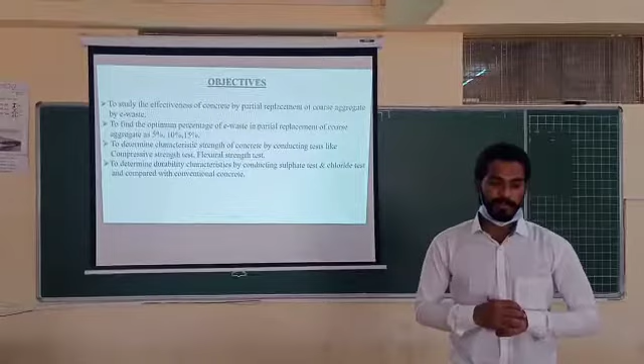Objectives. The main objective is to study the effectiveness of concrete by partial replacement of coarse aggregate by e-waste. To find the optimum percentage of e-waste in partial replacement of coarse aggregate at 5%, 10% and 15%. To determine the characteristic strength of concrete by conducting compressive strength and flexural strength tests. To determine the durability characteristics by conducting sulfate and chloride tests and compare them with conventional concrete.

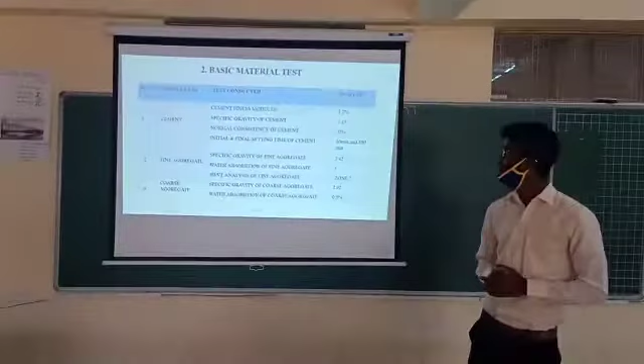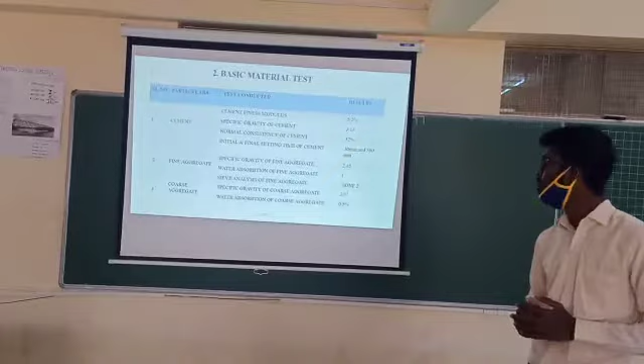We will continue with basic material tests. For cement, the fineness is 5.2%. The specific gravity of cement is 3.15. Normal consistency of cement is 32%. Initial and final setting time of cement is 30 minutes and 580 minutes. For fine aggregate, specific gravity is 2.42, water absorption is 1, and sieve analysis is 2. For coarse aggregate, specific gravity is 2.92 and water absorption is 0.5.

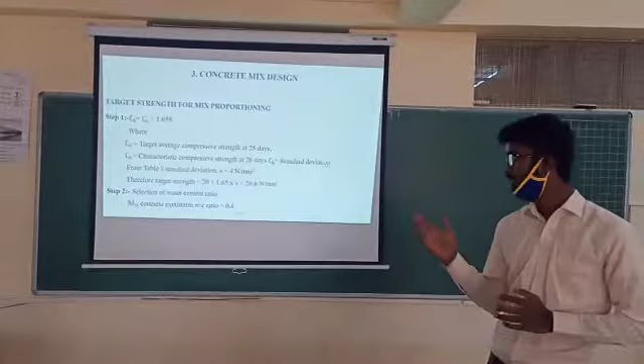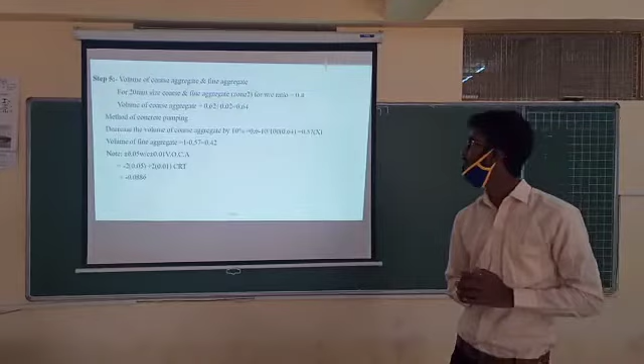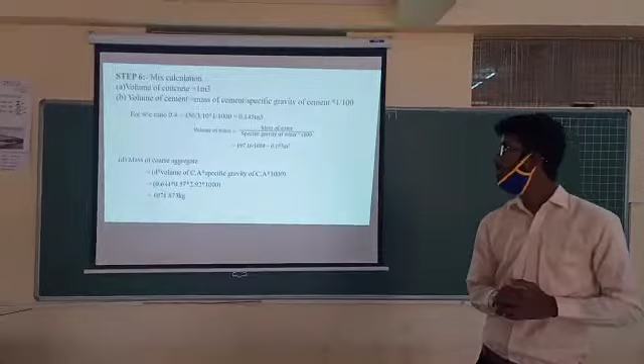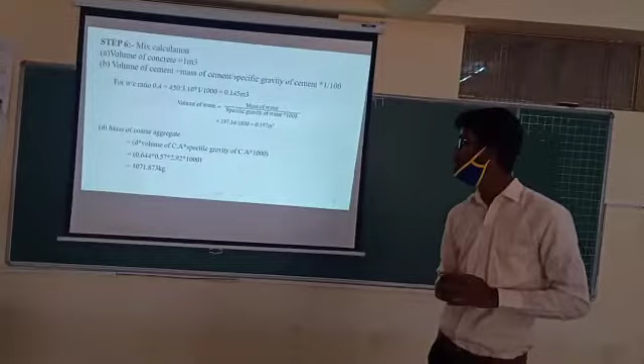From IS 10262, we got the target strength for mix proportion. Our target strength is 26.6 Newton per mm square. We use 0.4 water cement ratio and maximum cement content of 450 kg per meter cube. The volume of coarse aggregate is 0.64 and volume of fine aggregate is 0.4. For 1 meter cube of concrete, volume of cement is 0.145 meter cube and volume of water is 0.197 meter cube. Mass of coarse aggregate is 1071.873 kg and mass of fine aggregate is 670.146 kg.

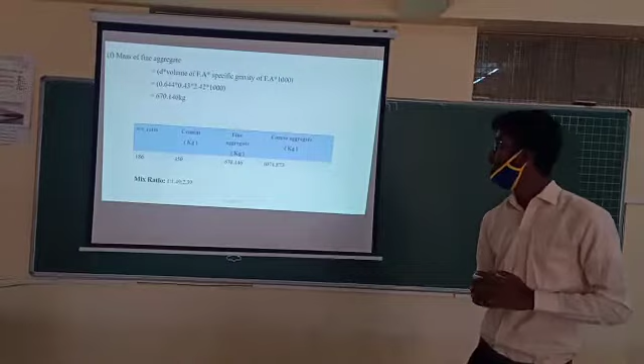Water is 186, cement 450 kg, fine aggregate 670.146 kg and coarse aggregate 1071.873 kg. We got a mix ratio of 1:1.49:2.39.

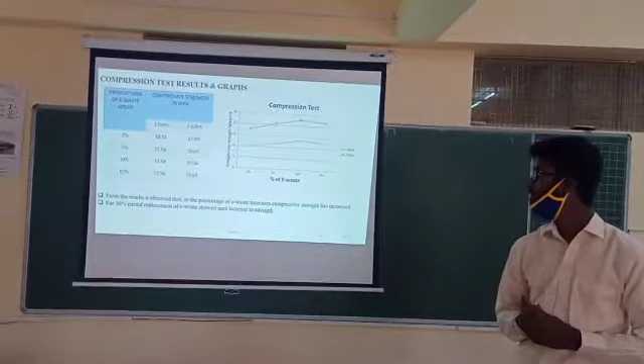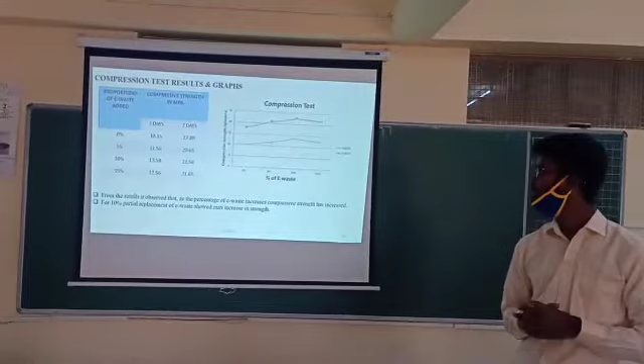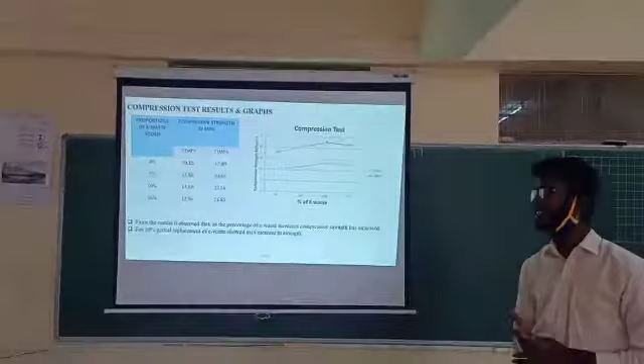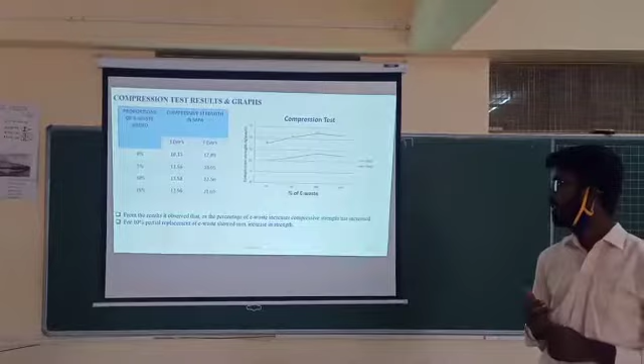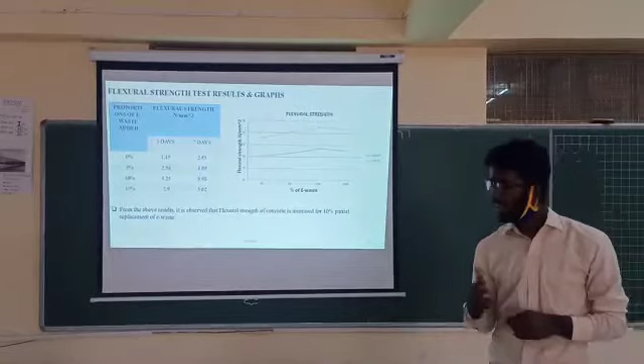And compression test results and graphs. From the results, we observed that at 10% e-waste replacement, we got 26% increase in strength over conventional concrete. In flexural strength also there is an increase.

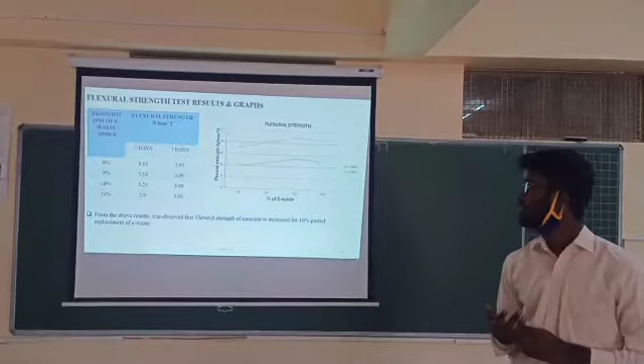Flexural strength test result. From the above result, it is observed that flexural strength of the concrete increases at 10% partial replacement of e-waste, and 51% strength increase when compared to conventional concrete. From the above result, it is observed that concrete has shown 6% decrease in strength compared to conventional concrete.

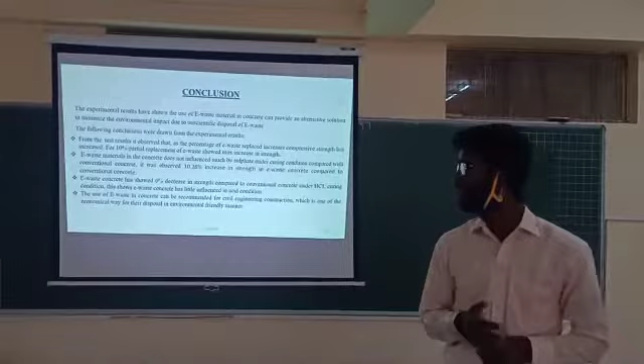And the conclusion. The experimental results have shown that use of e-waste material in concrete can provide an alternative solution to minimize the environmental impact of unscientific disposal of e-waste. The following conclusions were drawn from the experimental results.

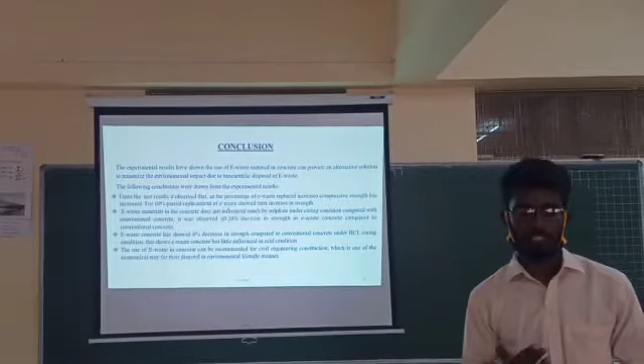From the test results, it is observed that as the percentage of e-waste replaced increases, compressive strength increased. 10% replacement of e-waste showed the maximum strength. E-waste material in concrete is not influenced much by sulfate under curing conditions compared with conventional concrete. It is observed there is a 10.28% increase in strength in e-waste concrete compared to conventional concrete. E-waste concrete has shown 6% decrease in strength compared to conventional concrete under HCl curing conditions. This shows e-waste concrete has little influence in acidic conditions.

The use of e-waste in concrete can be recommended for civil engineering construction, which is one of the economical ways for its disposal in an environmentally friendly manner. Scope for future study: the present study can be extended, and tests can be carried out for different grades of concrete. Admixtures can be used in the tests to get improved strength.

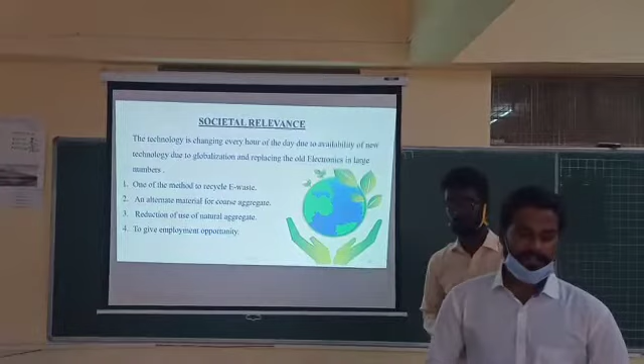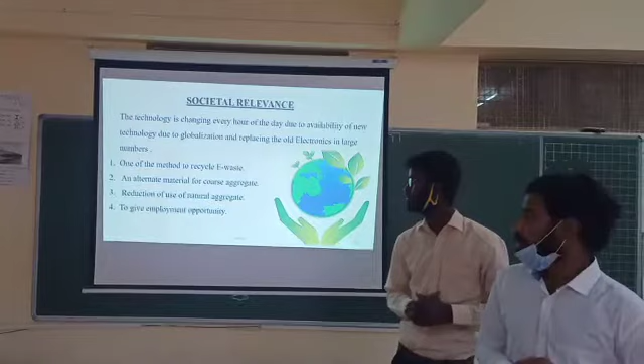Societal relevance. Technology is changing every hour of the day due to the availability of new technology and globalization, replacing old electronics in large numbers. It is a method to recycle e-waste, an alternate material for coarse aggregate, reduces the use of natural aggregate, and gives employment opportunities. And here are some references.